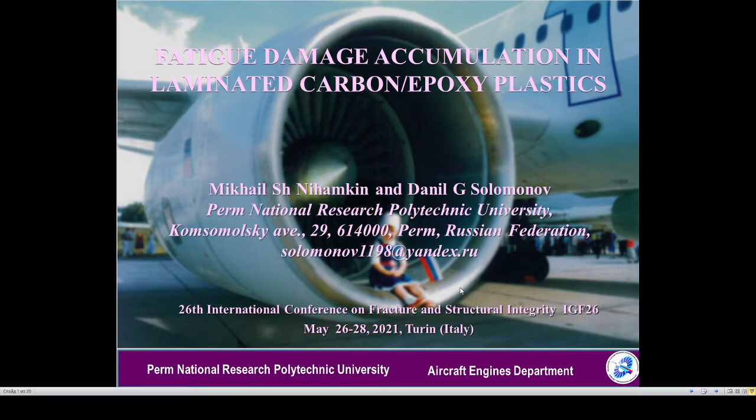The relevance of the problem is determined by the following factors. The first one is expanding the use of composites is an important condition for competitive ability in many areas. The next one is dynamic loading or vibrations is an inescapable factor of composite operating conditions. Also, fatigue failure is the most common cause of failure of machine parts. The next one is ensuring resistance to high cycle fatigue is the most important condition for the use of composites.

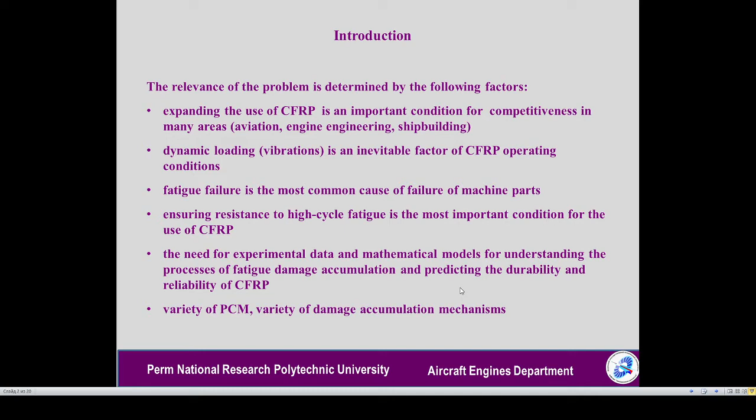And the need of experimental data and mathematical models for understanding the process of fatigue damage accumulation and predicting the durability and reliability of composites. The last factor is the variety of polymer composite materials and the variety of damage accumulation mechanisms. Examples from the aviation are shown on the slide.

The purpose of present research is to obtain experimental data on the change of the elastic characteristics of layered composites as fatigue damage accumulates. It should be emphasized that the task is to study 4 elastic parameters of the laminate monolayer: 2 Young's moduli, shear modulus, and Poisson ratio. The objectives of that investigation are shown on this slide.

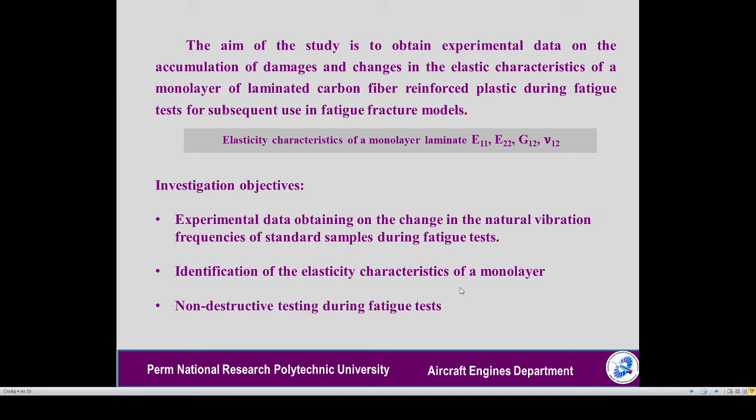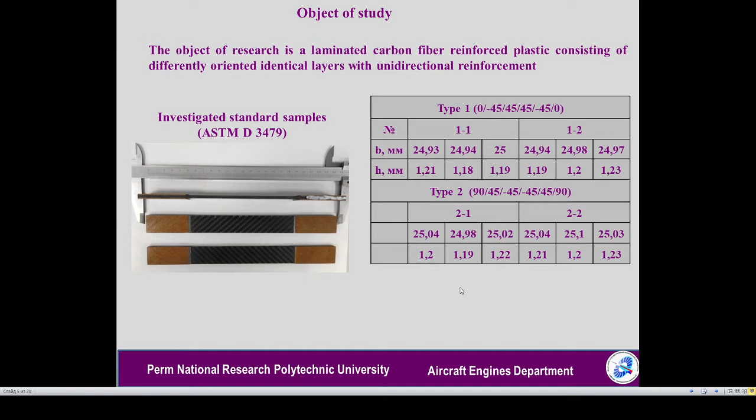The object of research is laminated carbon fiber reinforced plastic consisting of differently oriented identical layers with unidirectional reinforcement. 2 types of samples were studied. Information about them is shown on the slide. On this slide we can see the research scheme.

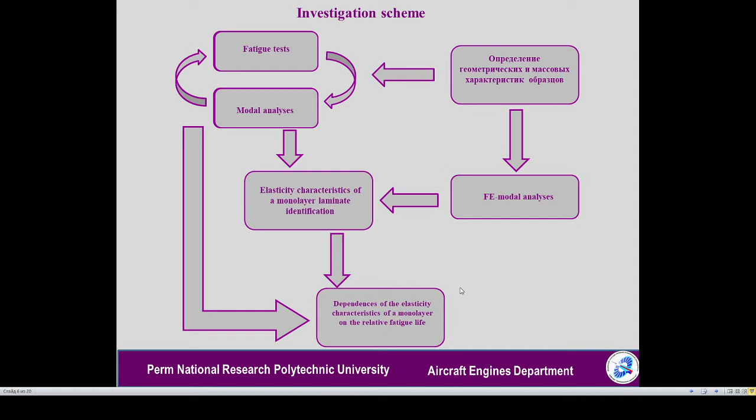Fatigue tests were carried out in accordance with the ASTM D standard using the Testronic 50 resonance testing machine. A tensile mode cyclic loading with the constant stress amplitude and asymmetry ratio of 0.1 was realized. The loading frequency was 40 Hz. The temperature of the sample was monitored using an infrared camera. Although the loading was carried out with the relatively high frequency, the temperature did not exceed 20 degrees.

The load amplitude was chosen so that the lifetime N of the sample was about 1 million cycles. For this purpose, the fatigue curves obtained in advance were used. The relative stress amplitude was 0.64 for the first type of samples and 0.3 for the second type.

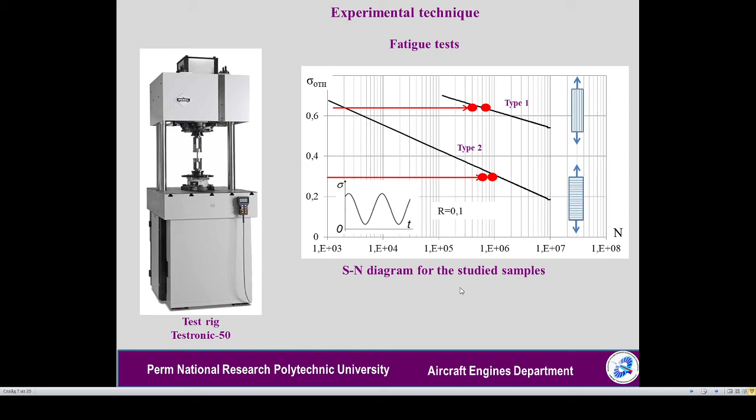The method of scanning laser vibrometry was used. The sample was attached to a rigid frame on thin elastic threads. Sample's vibrations were excited by an acoustic shaker and recorded using a scanning laser vibrometer PSV-400-3D. Thus, the tests were performed without contact of equipment with the sample. This made it possible to determine with high accuracy the first 8 natural frequencies in the range up to 2000 Hz.